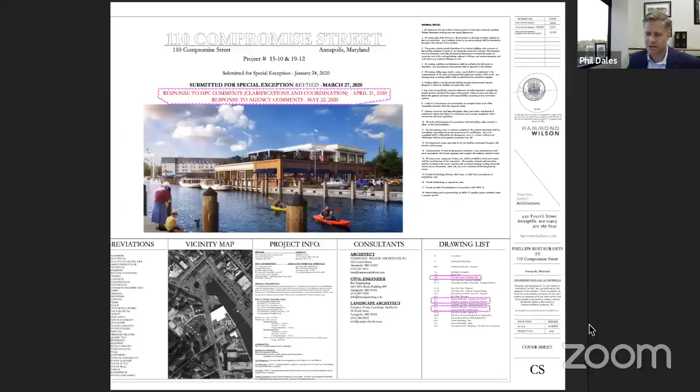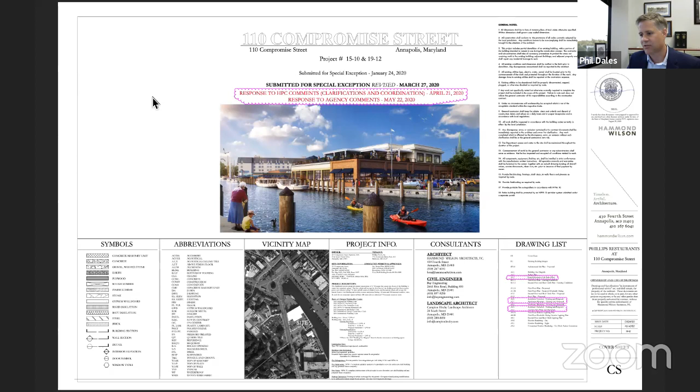So I want to introduce now to the board a set of drawings that Leo will share on his screen so that everyone can see them. We sent those earlier to the clerk through Julian, and I understand they're already part of the record with our application, but Leo's going to put them onto the screen now for the public to view on YouTube and for the board members to see here on this call. And Leo, once you're up and running, you can just go ahead and walk through these drawings and the site plan diagrams and the schematics, including the refuse plan, so the board understands what we're physically proposing here.

Sure, can everyone see my screen? Looks good, yes. Great, so I'll move through this fairly quickly. I know that you're all aware of the history of the project and often visit downtown and know what it looks like. Just as a preamble, we've already been through site design plan review for the project in its entirety, and also all of the proposed changes to the second floor and the entry to the building and other changes have been reviewed and approved by the Historic Preservation Commission. So this would be our last step in the entitlement process in order to move forward with the building permits for the building itself and then the fit out for the restaurants.

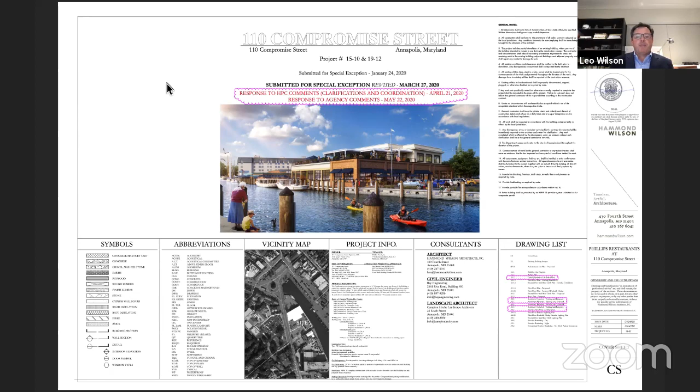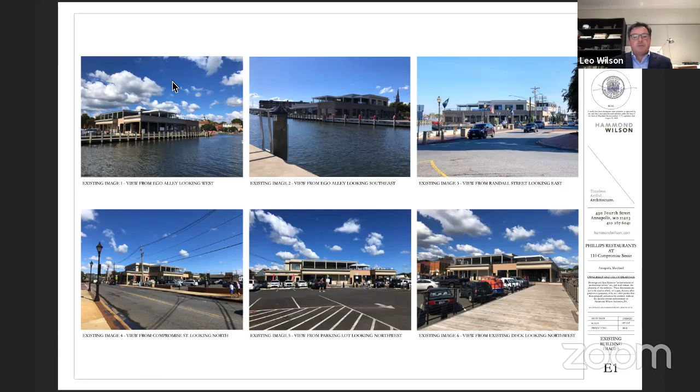So I'll just move through this. Here's a screenshot of what it might look like from outside. Let me see if I can move to the next screen here. Photographs, again this package is one that was submitted with the application, so I know you're familiar with it. Some shots of the building as it sits in its context along Ego Alley and of course Compromise Street.

Here's a diagram of the building, and what you'll see here is the first floor, which shows where Whalertown is, our first tenant. And then Oasis Marina has taken the other piece that faces onto Compromise, and then also faces onto the Donner parking lot. You'll see some common spaces here for entry and safe exit in these three gray areas. And then finally, the yellow area is the first floor area that will be occupied by Phillips Seafood.

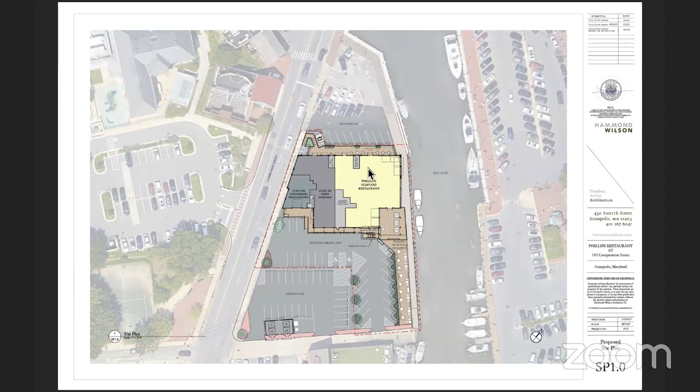You'll see the walkway that was built by 110 as part of an agreement with the city that connects Compromise out to the water along this edge. You'll also see a covered area outside where we've got some shedder tanks, some sorting tanks. The idea is we'll have some boats on the outside where watermen would come, and they'd be able to bring their product up onto the deck. And then people walking by, not just restaurant customers but also the general public, would be able to see some of that process happen along the way.

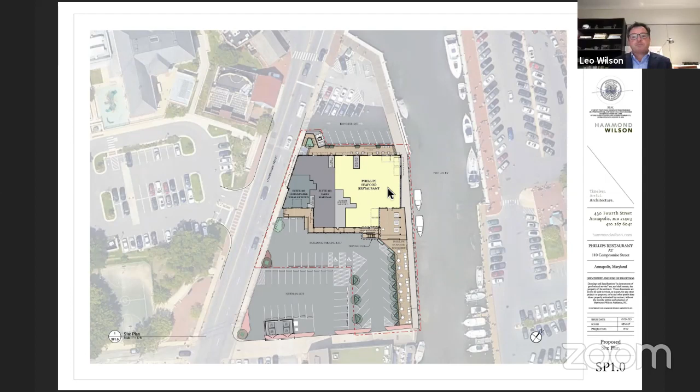And then finally, the outdoor dining deck that sits along the walkway along Ego Alley. It's raised up just a little bit to provide a separation between the open public way and the dining area itself. There's also green space provided in the parking lots and along the walkways, and those are per prior agreements with this Planning and Zoning Office for the site design review.

Here you just have a couple of diagrams here. These are really more safety diagrams, so I'm not sure I'm going to spend much time on those. It just provides information on the exiting for the building.

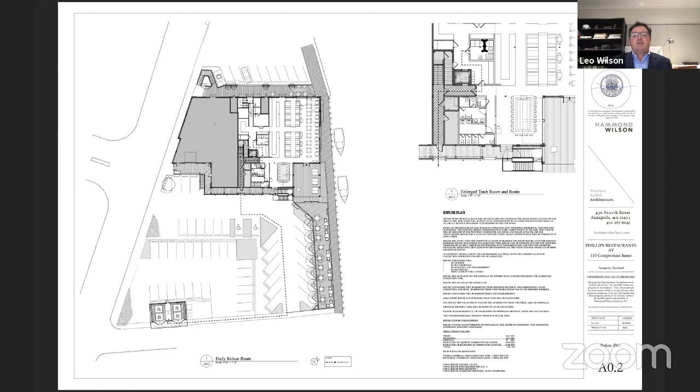What we've got on this sheet is just a blow up. One of the things we're asked to make sure we have a clear understanding of is how refuse would be handled at the property. It used to be we could put the stuff in dumpsters and just take it out, but now we're being asked to try and contain odors and other problems associated with refuse in the building. So we've included an indoor trash room here with a compactor for recyclables. The plan is to contain the trash in here during the workday, and at the end of the day, come down this exit path through the building and out to the dumpsters, situated in the parking lot over in this area here.

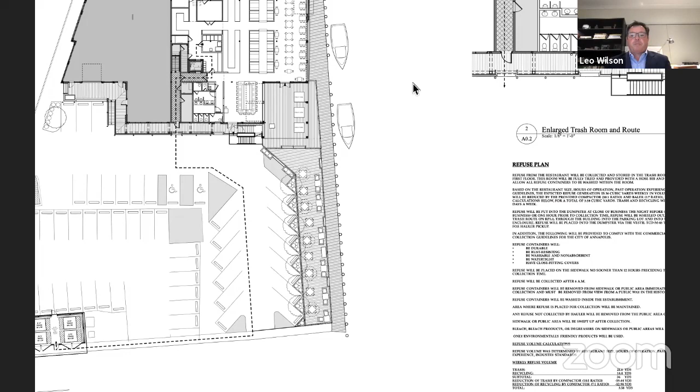So let's go to the next one. Bear with me.

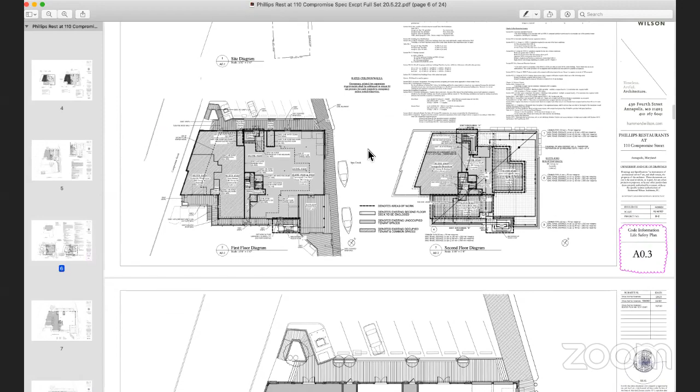This drawing shows what the building currently includes, which is open space where the restaurant goes. The exits are already configured. The openings to the exterior of the building are already in place on the first floor. And essentially the core and shell of the building is in place right now.

On the second floor, the space closest to Compromise is occupied by the boat shows. So our space remaining for the restaurant use is on the waterfront side here, with outdoor areas, a trellised area, and some indoor space.

Through a series of meetings with the city, we were able to come up with plans, with Steve Phillips, for the first floor, which includes dining area along the perimeter of the building. Our kitchen space is back in this area - it's an open kitchen concept. We've got outdoor space over here, toilet rooms over here, exits are already configured, and a lounge area over here for people waiting to be seated.

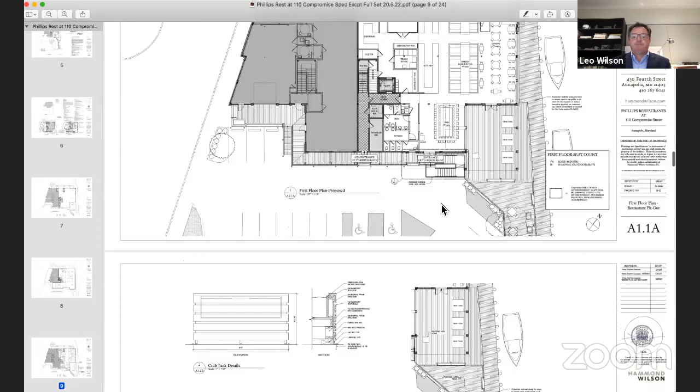This is the entry stair to Maxine's on the second floor. A question, Leo - where are the doors or windows or movable panels that you open up to bring in the outside view and air?

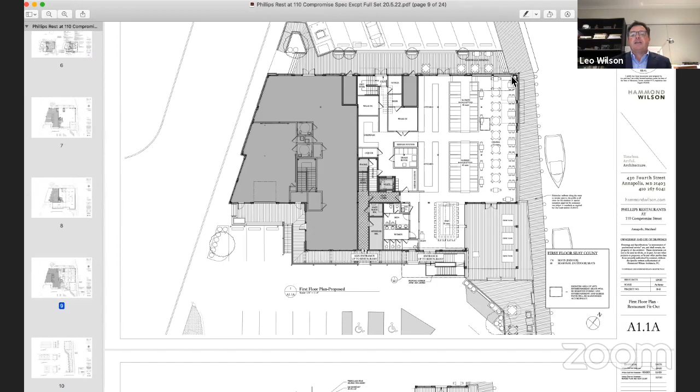Okay, so on the first floor, we've got overhead doors at the corner here near the Donner lot and Ego Alley. That wraps around - these three panels over here are operable right now. And then finally, there's two more operable panels over here. They're situated so we can open up the building to the water in some areas.

This is kind of a neat corner here because the view shed from downtown cuts through the building right here. And while we didn't take the building down, we decided to open this corner up so you could look through the building if you were to walk along the walkway.

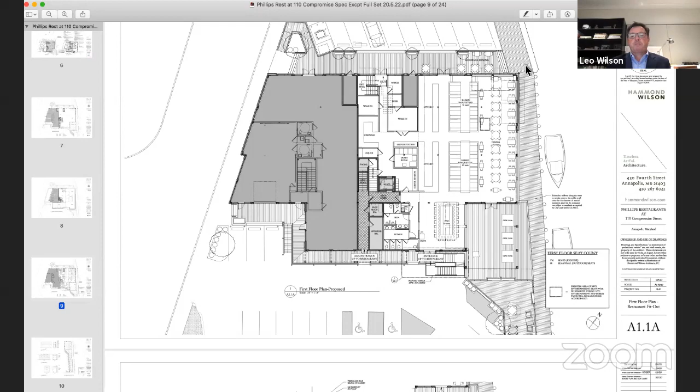On the second floor? Well, I'm coming up to that - that's the next slide.

Here's a blow up of the outdoor dining area. Again, you can see tables situated on the deck, landscape elements placed between the parking and the deck area, and then the open walkway that's been left in place per prior agreements with the city.

Leo, this is Nadine - what is the barrier between the sidewalk and the seating in this area you're talking about? Right here where my cursor is? Yeah. So there's steps at this location, and this location, with 2 steps up to the deck. Then this is an open cable rail assembly that sits on the edge here. So it's open - they're removable for when the boat show takes use of the space, so we can take those out, but there's a railing for safety that separates this area from the upper area, but it's all open.

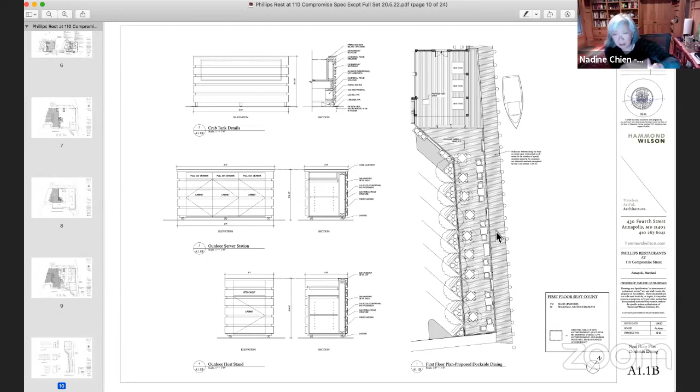Okay, the reason I asked the question is because of keeping the public walkway open, in case patrons would somehow be standing in the public walkway waiting to get into the restaurant. But it sounds like that's not going to be the case.

We don't believe so. Our primary entry point is over here, and our hostess table is right here. The idea is people would park on either side, the entry comes up through here, and the staging area for people to come inside is up on this deck area here.

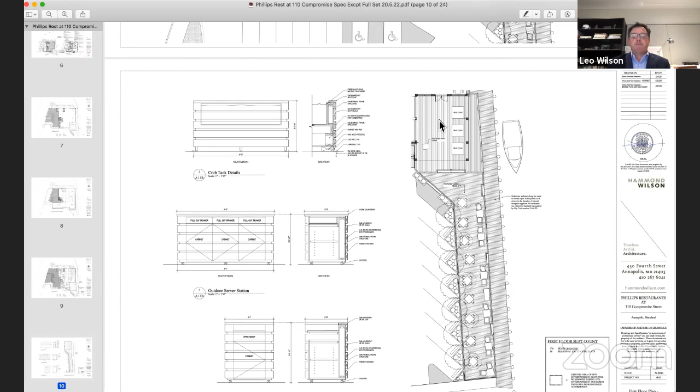So then we go to the second floor. Through prior agreements with the Historic Preservation Commission and the city, we received permission to enclose some of this pergola with opening doors, as Chairman Gallagher asked about. Those panels happen here, here, here, around this room as well. So the outdoor area is here, and this is a seasonally open area - if it's nice enough, we'll open those doors. The ability to close it lets us use that space during the winter months or when it's too cool to have them open.

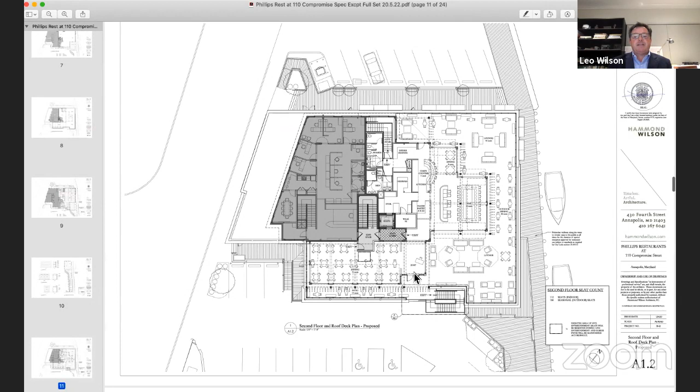We've got an open kitchen concept over here with some back of house space in this area. Emergency exit through this area, and a second means of egress is over here. Our main stairway comes up from the parking lot outside into the deck. And then the entry for Maxine's, the formal entry, is right here, with the hostess station.

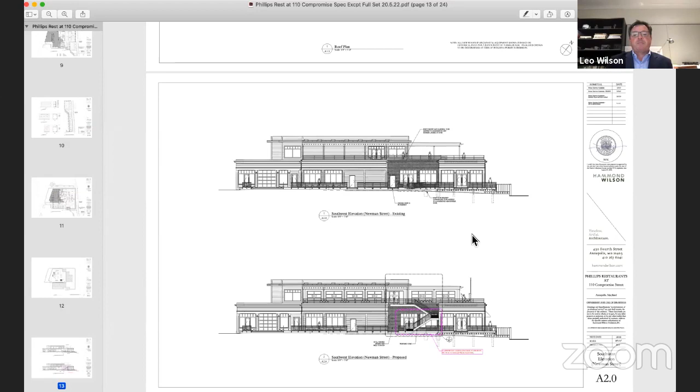Elevations of the building - these are somewhat difficult to read because there's a lot of movement in terms of where the facades move back and forth relative to the perimeter of the building. But here you'll see the side that's visible from the Donner lot. Over here we have a snag-a-slip in this area. And, sorry, I got myself confused here - this is Whalertown over here, and this is my main entry for the restaurant over here.

So these kind of show what we had before, and this is the new stair that's part of the approval we got through site design review that takes you up into Maxine's.

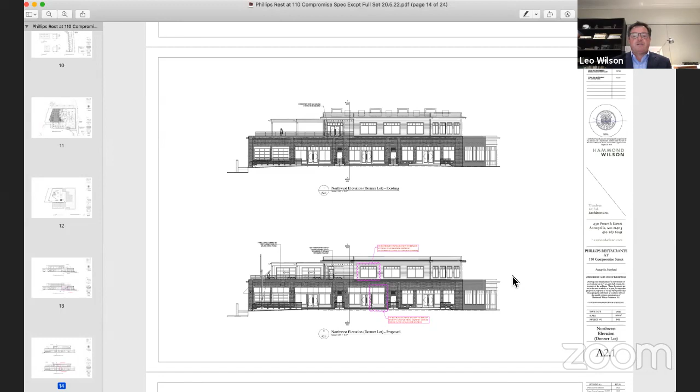Same configuration of drawings here - these were the elevations that were presented and approved through the HPC. We did make a few window modifications to facilitate the floor plans required for operation of the restaurant, so a couple minor changes to the windows. We included the HPC comments only because we wanted to make sure there wasn't a separation between what they approved and what you approved. These are the same drawings.

So again, here's the elevation that shows the compromise. This is where Whalertown is right now, this is where Oasis Marina is, and here are the offices for the Annapolis boat shows. And then finally on the waterfront side, here you can see the dock.

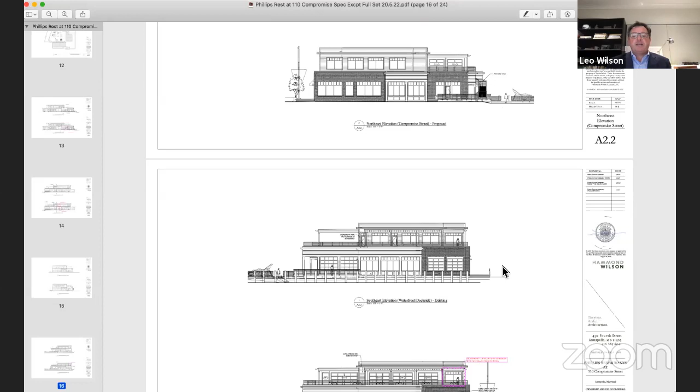These are the operable windows on the first floor, the overhead elements - they repeat again over here, tucked back in. And then finally at the top, going down here, you can see the new opening elements on the second floor.

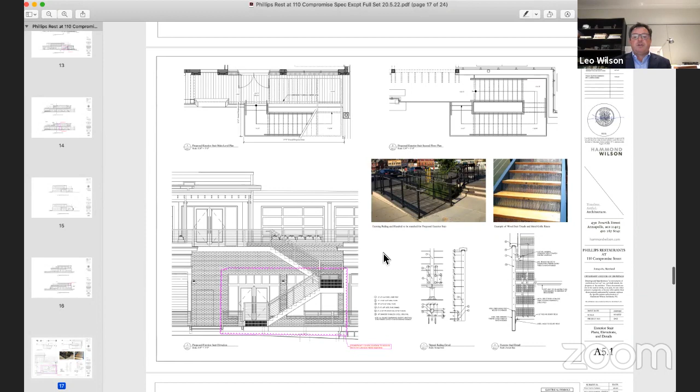Details on the stair, again reviewed and approved by HPC. It follows the same vocabulary we established with the railing assemblies on the deck that you can see there now, with a bit more detail on them. You can see the cable rail assemblies that run in front of the building to keep it light, plus details for how that's built and some precedent images.

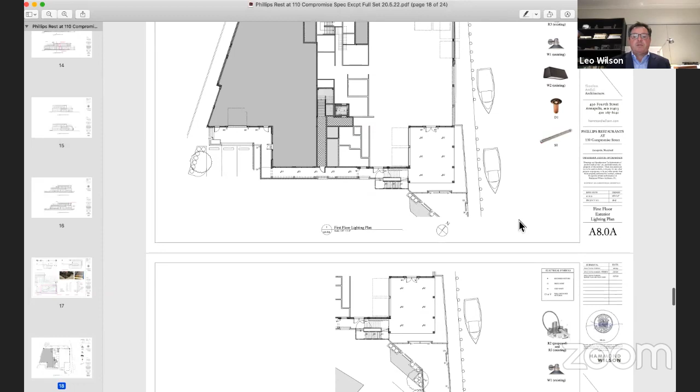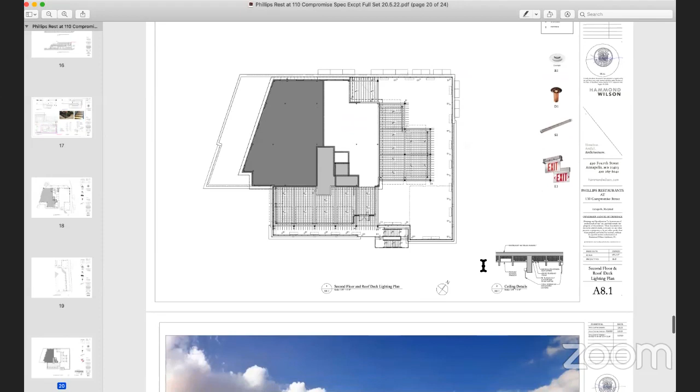Again, they're repeated over here, the same type of fixtures. Here they are in the deck, and here in the covering for the covered entry area. They repeat again on the upper floor. The only lights we anticipate being visible from a distance are the exit lights, required by code. This detail shows how they're recessed up into the pergola assembly that forms the ceiling.

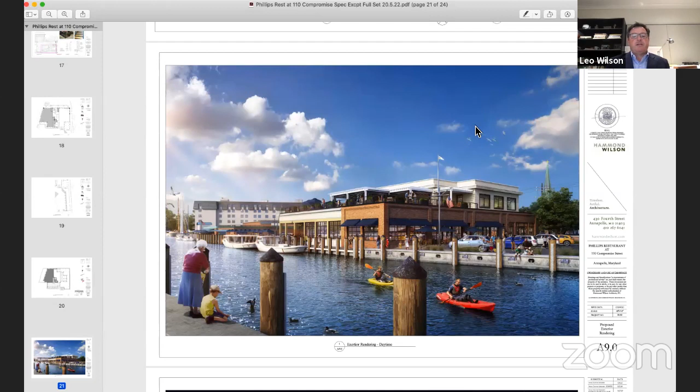So we decided to do a couple renderings because it's so hard to read the two-dimensional images. Here you'll see the first floor that tried to pick up the character of the building when it was Faucets—only we took all the cinder block and covered it with brick, and created larger openings to create activity in the building that was visible from outside, connecting the inside to the outside.

Again, you may recall when this was Faucets, this was all one flat plane of masonry, and this corner was open where the loading dock is. We've repurposed the space so we can provide the entry over here rather than the loading. It's interesting that our hope is to bring in watermen to unload right there, so I think that'll be a nice recollection of what this space was used for at one time.

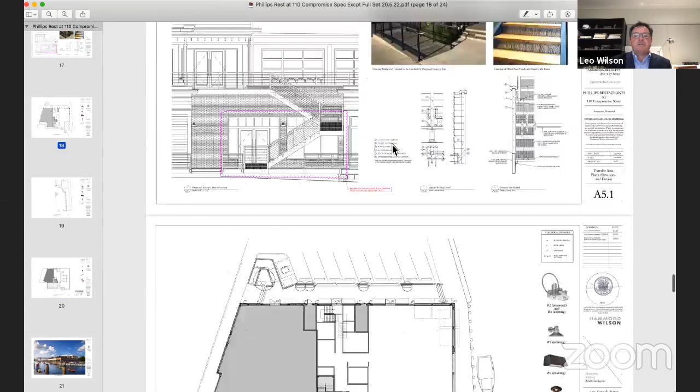If we go back to the first floor plan, let me just go back here real quick. The live music area on the first floor—I think we have that set up over in this area. Got it.

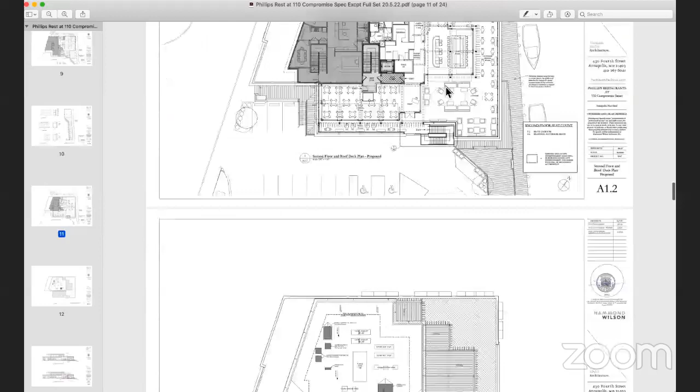Will it be on the second floor as well? Phil, I can't recall if we have second floor music set up. We may have—I don't believe we do. Marshall, can you confirm that? I think Leo was in the right place with that cursor for the first floor. If Marshall's there and unmuted, it'd be great to chime in.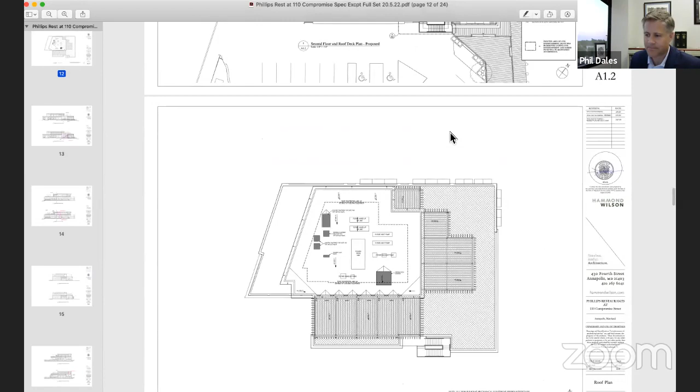Yes, on the second floor, right beneath the shared exit stair at the bottom. Okay, so towards the lot, Leo, further—there's a heavy dashed line. Right in here, Marshall? No, down the shared exit next to the elevator. There you go, you're closer, Leo. Over—that's where the live entertainment would be, on the second floor. Oh, right in here. Yep, exactly, this box here, right Marshall? Yep, correct. On both ends there's a dark dashed line indicating where we intend on having the live music. There's a very small stage. Correct.

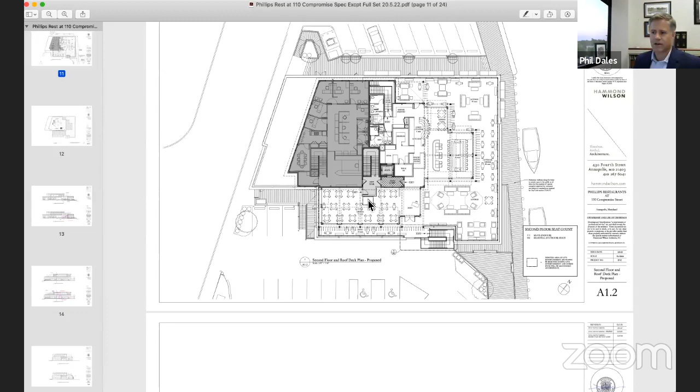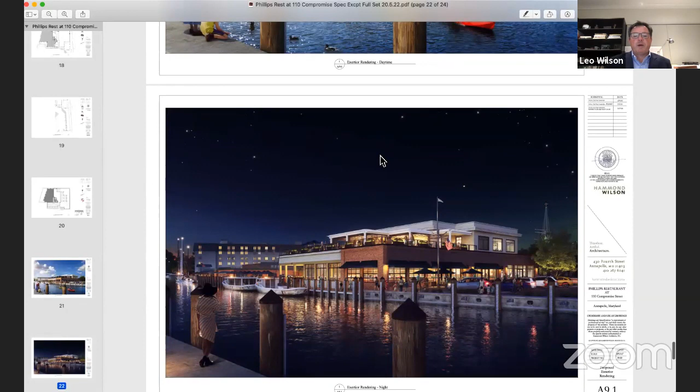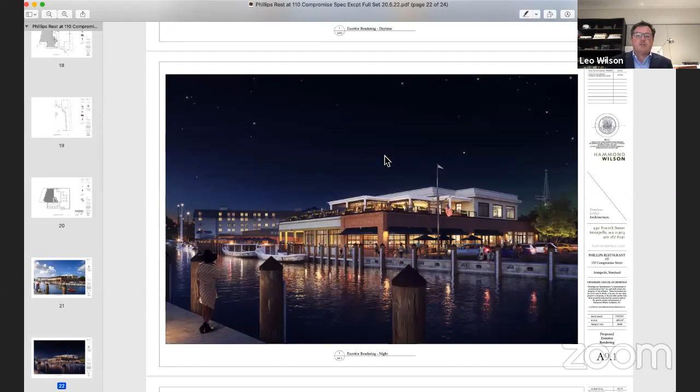And then finally, an image showing what it might look like in the evening. So we're excited about reactivating this building. We think it's been a long road for the owners and for the city too, and I think what we've got here is a successful way to put this building back into use at a time it's important to do so.

Which one of those big boats on the end is yours? Well, I think this is the one I'm looking at right now. Good, sure it's not the dinghy, Leo? Well, this is the one I have, but that's the one I'm looking at. Oh, they're both his—he just leases one out to the public.

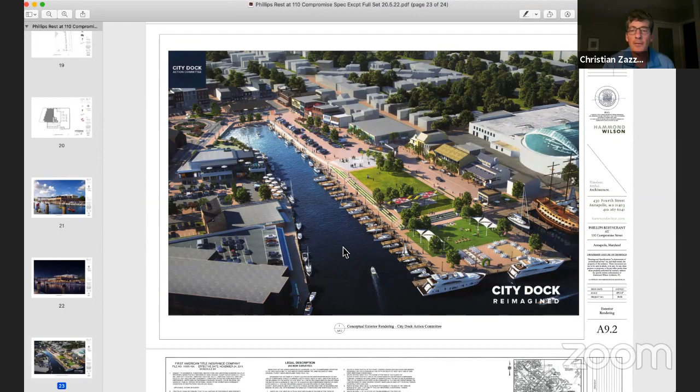Thank you, Leo. With that, I'm done everything I wanted to say, and I'll answer questions.

For the questions, like I said at the beginning of this presentation, in groups of code criteria, just connect them to the presentation you just made. After that, we don't need to go through each criterion by itself.

I'll just ask Leo about section 21-26-050, A through F, leaving off G here. Those criteria relate to health, safety, and welfare, nearby properties, which Mr. Phillips already testified to, adequate utilities, access and facilities, ingress and egress, and the comprehensive plan, and how this use fits in with the comprehensive plan.

You've read the statement and verified that you find it to be accurate. With that in mind, is it your opinion that the plans you just showed and the statement demonstrate compliance with those criteria? It is. We spent a considerable amount of time working with staff at Planning and Zoning and going back and forth with different components of this build to make sure that we were in compliance.

And it's our belief that through those discussions, we were able to get to a point where we meet them completely. Okay, thank you. And now we'll jump ahead to 21-64-300.

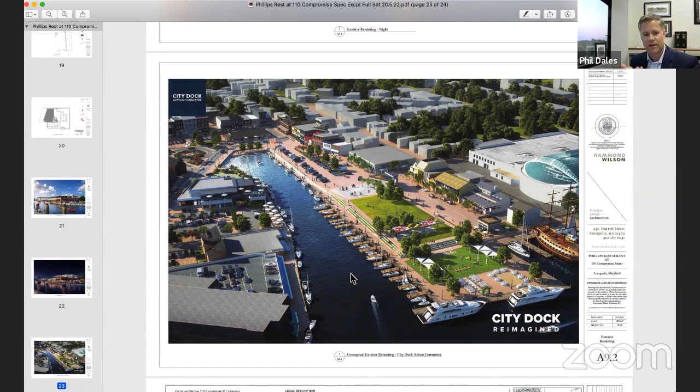The relevant parts there are B through G. Mr. Wilson, would you speak to the site design plan requirements related to functioning of kitchens and the noise that you can expect from this building as designed, and the refuse plan and what that does for the requirements to keep trash maintained orderly?

You've already walked us through a lot of that. Can you just confirm for the board that what you've just shown them, including the site design plan criteria in 21-22, all of this conforms with the requirements here in 21-64-300 B through G?

We do. I was part of the original discussions for the property when we decided we wanted to redevelop it with Mr. Bruno and Mr. Keenan. And we had discussions with Summer Garden Theater, and they explained to us what their concerns were and their time constraints. So the configuration and location of the restaurants is purposefully set away from our most sensitive neighbor to make sure that we don't impede on what they're trying to do.

As a matter of fact, we think it might be kind of nice because it'll provide another dining place for people before and after. So yes, we do believe we meet all those criteria. Thank you. And we've now received a letter of approval and a recommendation of support from Summer Garden Theater.

Mr. Phillips, just a couple of the criteria in this section relate to restaurant operations. If you could briefly confirm for us that the operations of the restaurant we described in the statement of support, which the board's had time to review, are all accurate, and state that we will make sure that the noises from the restaurant are minimalized, there will be no loitering allowed, and there will be no trash or litter from people using the restaurant.

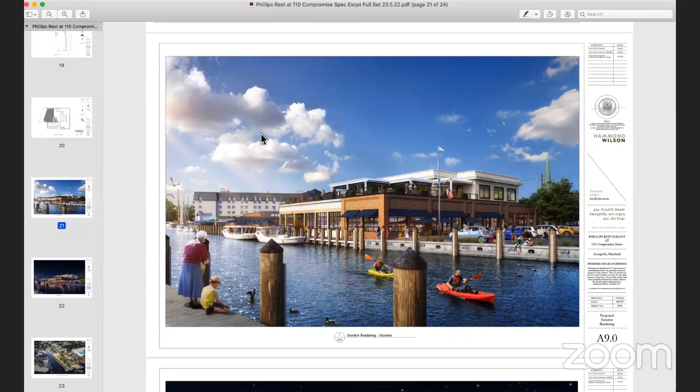Okay, thank you very much, Mr. Phillips. And Mr. Wilson, the last set of questions here for you. This is section 2164-540F, which is specifically about a restaurant in the WMC Maritime Zone. Most of those criteria relate to outdoor dining.

So for the outdoor dining and rooftop area, I want to make sure that we all understand this is only going to allow for operations until midnight, and that alcohol would only be served outside while the kitchens are open, and that there would be no bar dancing or live entertainment outside. We've already stated that.

You said that earlier, Mr. Wilson, and that the ratio of outdoor to indoor seats complies with this section. There cannot be more than 75% of the indoor seats as outdoor seats.

And then finally, you went through the lighting plan. Can you confirm for us that the statement accurately describes the lighting plan, that your architectural sheets accurately show the lighting plan, and that the lighting plan and noise mitigation efforts that you put into your plans conform with the requirements and allow this site to conform with the requirements of 2164-540F?

So the project complies with all of those standards, Mr. Dow. Thank you very much. Okay, that's it from Mr. Wilson and Mr. Phillips.

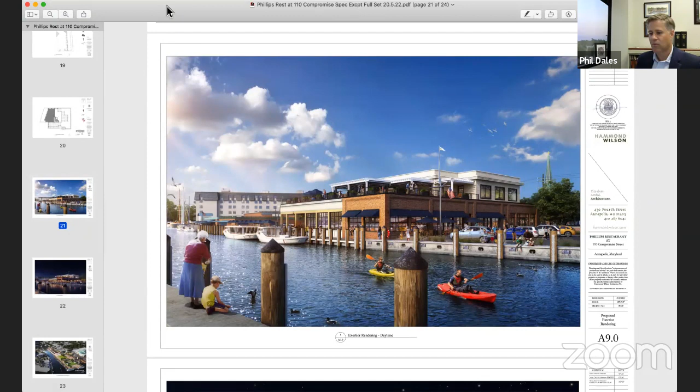And just as a closing statement, I want to say that we've tried to keep this as brief as we could for a fairly large application and a very important building. As the chairman noted, and as I noted, we're relying on your familiarity with our statement in support of this application, as well as the staff report. Those documents include a lot of facts we've offered and analysis of the legal standards. We're hopeful that in your deliberations and ultimately your opinion, you would incorporate some of those findings of fact, or those facts in your findings of fact, and rely on some of the legal analysis we put there, in consultation with your counsel, who's on this virtual meeting with us today. Thank you very much, and that'll conclude our argument. We'll be here for answering any of your questions about what we've said here tonight.

Thank you, Mr. Dales. Questions from members of the board? Good, Bob. I'm good. No, I have some clarifying questions. If you could, whoever, address the walkway that abuts the Donner lot.

I believe I heard that the city had asked that that walkway be put in place to allow access to the public walkway around Ego Alley. Was the intent that there be free passage along that walkway, Dr. Chen? I'll begin the answer, and I think Leo can add to it since he was part of the planning of that easement. We did an analysis of the easement that allows pedestrian traffic from Compromise to the walkway along Ego Alley, and found that the intent of that easement, in our opinion, is to make sure that there will be pedestrian flow possible from Compromise to the alley, but does not preclude the placement of tables.

Our understanding is that the approval here tonight should approve the seating in that area, similarly to the way the board would approve seating on any city sidewalk, that it would be approved subject to us acquiring the necessary permits from the city to place tables on that public walkway space.

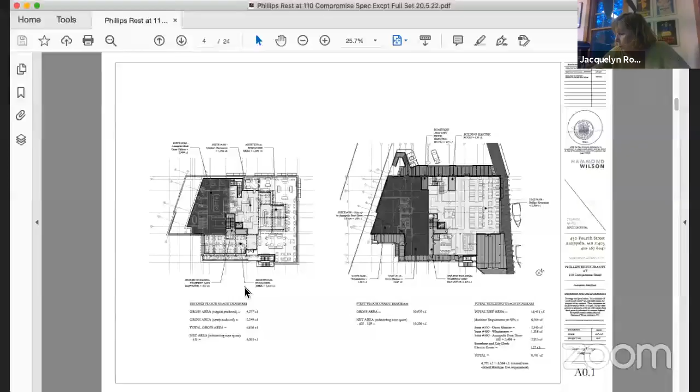If you look at the first floor plan, I think that's sheet A1.1A. The live music area is in that darker hashed black, and it's not as close to the corner as you may have been indicating during, yeah, there it is. So does that help at all as you propose the suggestion here? The chairman's concerned that the live music may have been closer to the corner in the outdoor area.

So, Leah, can you just identify with that little cursor of yours where the overhead doors are on this page? There's 1, 2, 3, 4 in place right now, and this is over in this area here. So it's not directly adjacent to the openings, it's set towards the center of the restaurant.

We had initially proposed right in this corner here, and that's when we got feedback from planning and zoning that we really don't want it there, because it seemed to work pretty well from a plan standpoint. We like the idea of having it there, but we were asked to pull it back into the center of the building. Bob, I'd love for you to weigh in here with a little historical context.

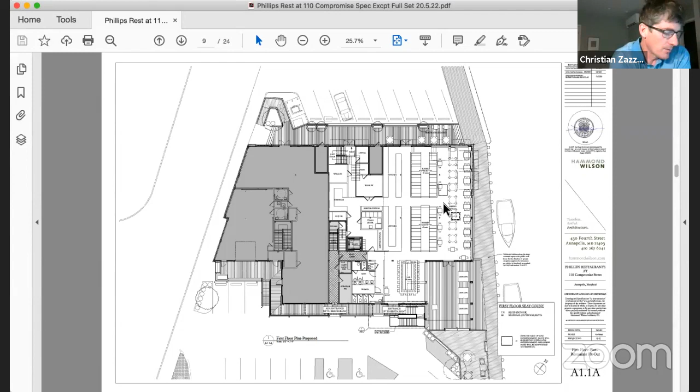We've had this noise issue come up before with noise emanating from buildings, whether they're poorly constructed, have large overhead doors, or just small. The city ordinance backstops noise levels beyond the purview of this board. They have to comply with it, and I would suggest that the ambient noise level of an active, vigorous city dock in that area probably represents a greater threat than the piano acoustic.

But I'm open to conditions that will survive an appeal. We can come back to that. We can think about that for next time.

I guess there have always been questions raised about whether anybody enforces the code provisions on noise. There is enforcement of noise, and it's really on a complaint basis.

Okay, so speaking of enforcement, I believe I read that with respect to one of these 3 restaurants, or maybe all of them, that there's a requirement that there won't be disposable plates and utensils. Is that right? For a standard restaurant, that's true. Okay, and so we've heard complaints about another standard restaurant that we approved a few years ago, where they are using the disposable items and there's no enforcement of that. Is there anything we can do in processing this special exception that will make that enforcement problem go away?